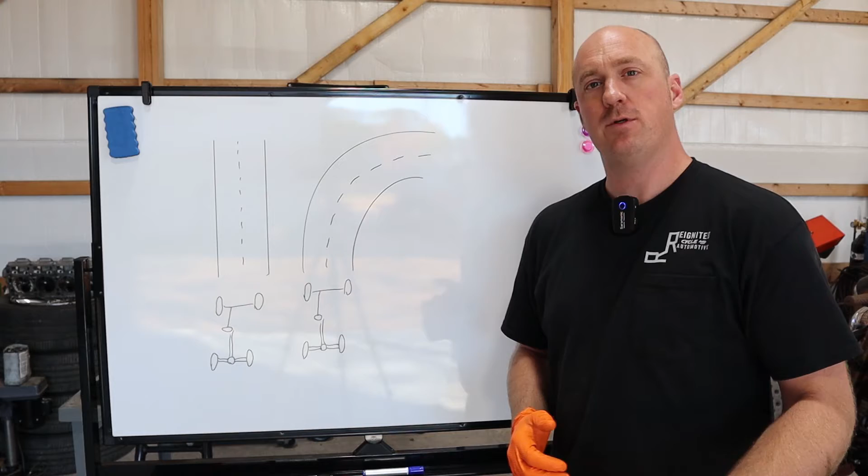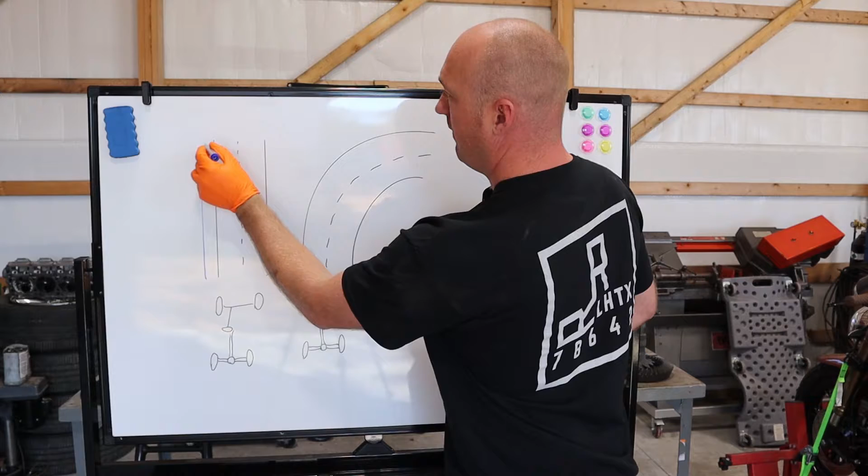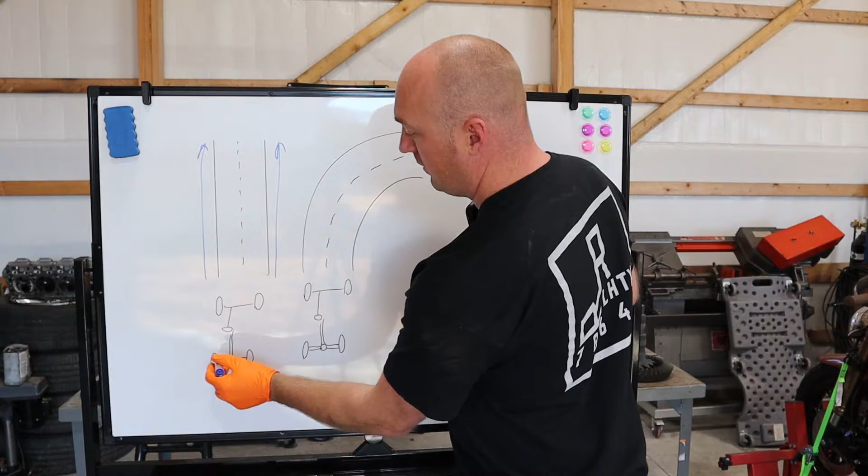Now, why would you want that? Well, in this very crudely drawn illustration here, I'll give you an example. So the vehicle, as long as it's moving straight, you can see that the path of the wheels is identical both sides. That means they're both traveling at the exact same speed. So in this case, if the rear differential were locked and both wheels were traveling at the same speeds, it'd be just fine because they have the exact same distance to travel.

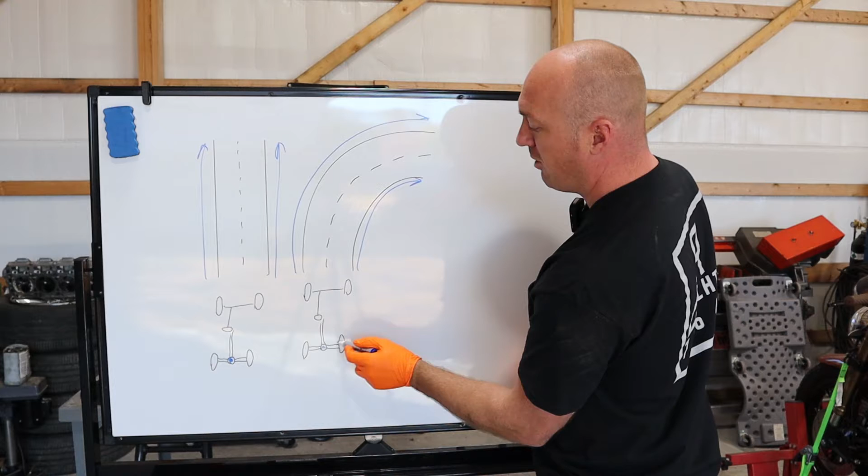Now, imagine you have to go around the corner, which does tend to happen when you're driving a car. You can see that the distance that the outer wheel has to travel is very much so farther than the inside wheel. So there's a differential of speeds happening there. If this rear axle were locked going around that corner, then this inside tire would be trying to match the speed of the outside tire, and you'd essentially be doing a burnout on the inside tire all the way around.

You can hear that in the car. It'll start to hop and chirp and skip around. Not something that people really want in an everyday driver. So they have what's called an open differential, which allows for that differential of tire speed so you can go around a corner smoothly and not even notice. Now, why is this a detriment?

Well, because of the way in which this open differential works, if you intentionally try to put power to the ground, as in doing a burnout or you're trying to take off from a launch, the vehicle is going to put all of the power to the tire that has the least amount of grip. So if one tire starts spinning, it's going to send every bit of power to that spinning tire. That's why it'll spin really, really fast, but the other tire won't do anything. And that's obviously not what you want in any sort of a drag race application or performance application. You want the power to be going to both wheels equally.

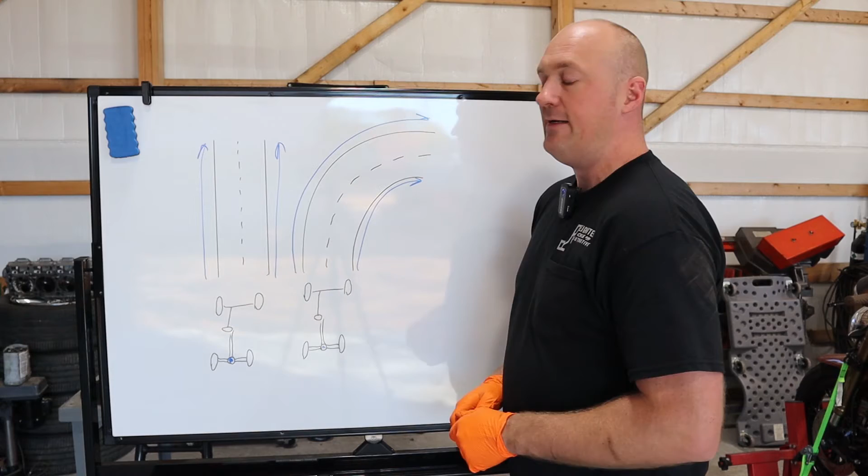Now, a limited slip differential allows you the best of both worlds. You will still have the open diff capabilities to go around corners smoothly, but when you really put the power to the ground, it will push that power out to both sides so you get power at both tires and you can get the maximum amount of traction available. So really that's the point of having a limited slip differential, and we're going to install it now on my C10.

All right, so we're going to be installing a posi-track style differential in this rear end, and I think it's important before we actually install this that you have an exact understanding of how this thing works, and it can get a little bit technical.

So in this case, I'm going to defer to my friend, Mr. Nunamaker. How exactly does a posi-track rear end on a Plymouth work? It just does. So there it is. Now you are fully aware and up to date of exactly how it is that a posi-track rear end works.

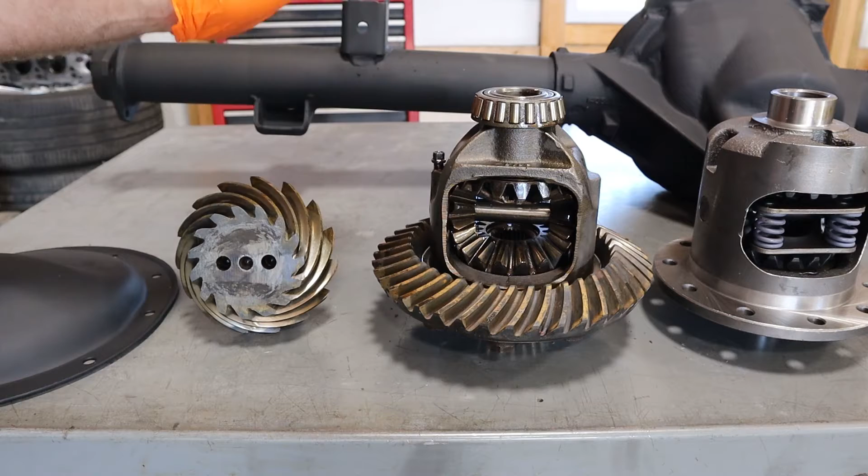Let's install it. All right, so another reason I'm doing the upgrade here, besides just the limited slip diff, is I'm changing the gear ratio because this gear ratio is 2.73 gearing. So it has 15 teeth on the pinion and 41 on the ring gear. 2.73 gears are great for highway mileage or for keeping the RPMs down when you're going highway speeds. That's not what I'm after here. I'm after something a bit more sporty.

So I'm going with a more traditional 3.73 gear ratio, but that means I have to replace both the pinion and the ring gear with a new one, which this is a great time to do it because I am replacing the carrier anyway. So let's move forward with that.

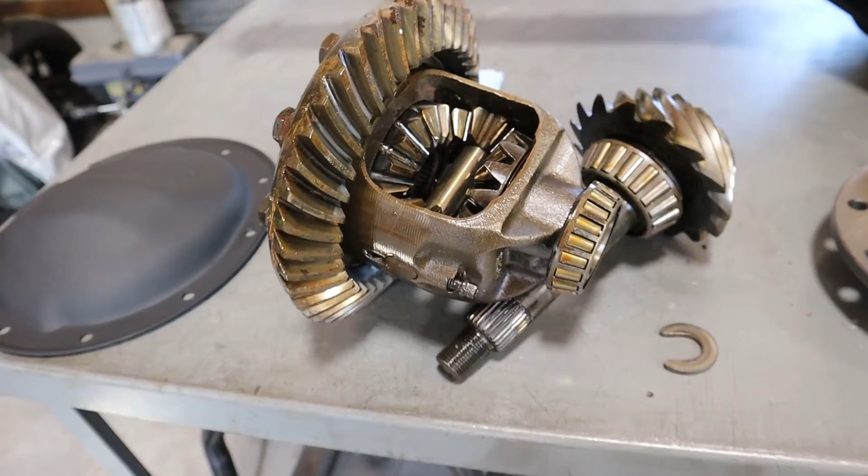All right, we're gonna start with a quick lesson on how to actually remove the carrier from the rear end, because you don't actually have to remove the entire rear axle from the vehicle to do this. So what you need to do is, there's a little bolt here.

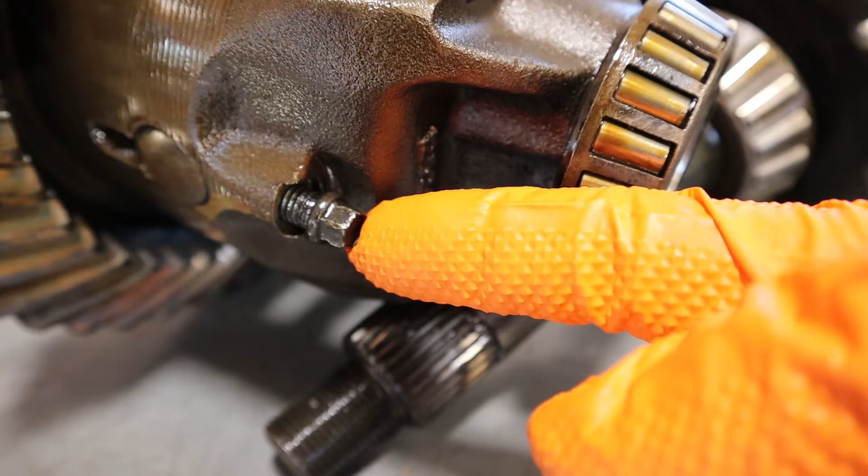You spin the carrier around so you can gain access to this little 8mm head bolt. And once you remove this, it allows the differential pin to slide out of the housing. Now, after that slides out, you push the axles in towards the center, and these little C-clips that are in there will fall out of place. Once the C-clips fall out of place, the axles themselves can be removed completely from the carrier assembly.

Now, once you've removed both of the axles, I definitely recommend that you put the differential pin back in and throw the bolt back in, because with the differential pin out of there, if you rotate the carrier, the spider gears can actually fall out of the carrier housing, and it is pretty difficult to get them back in there. So put the diff pin back into place before you go rotating the carrier.

And then after the axles are removed, go ahead and pull the caps on each side and you can remove the carrier from the rear end housing. All right, in this case, I will be replacing the carrier and the ring gear and the pinion gear, all the bearings with all new components. So basically this entire thing goes in the garbage, and we're gonna start fresh over here.

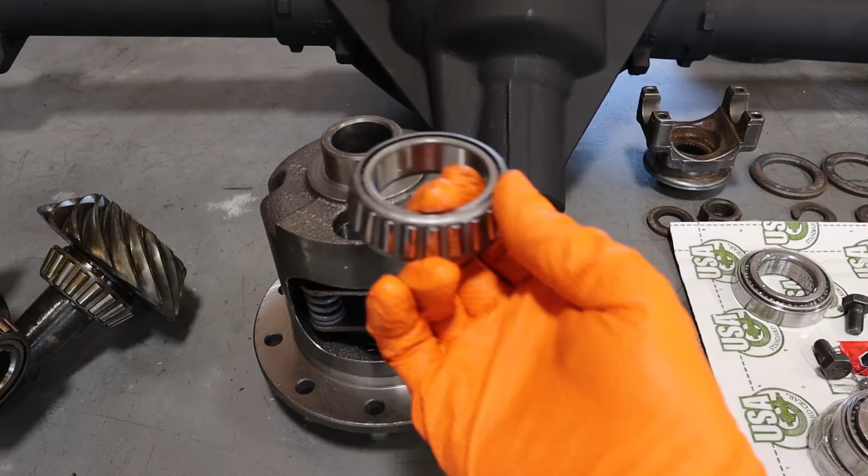So the very first thing we're going to do is install the carrier bearings on the end. Now, obviously it is best if you have a press to do this. However, it is not entirely necessary. If you can find a tube that has the exact diameter of the inside race here, okay, do not get any pressure on the outside race, but if you can find something that only has pressure on the inside race, then you can kind of pop that on with a hammer or something. But again, the best choice is always a press if you have access to one.

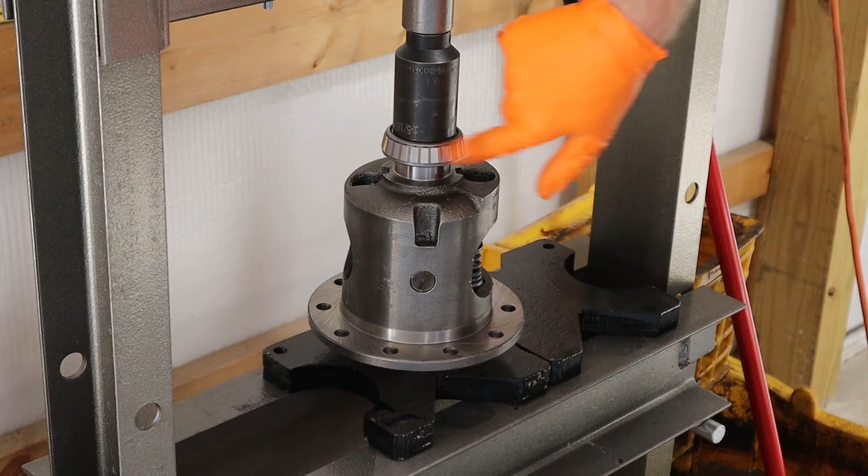So make sure when you're pressing this on that you can actually spin the outer race freely, so you know you don't have any pressure on this, only on the inside race. All right, so you saw there we got the carrier bearings installed on both sides. They both spin freely. Now we're going to go ahead and install the ring gear onto the carrier.

Now, something to remember about this ring gear and the bolts, which I got new bolts with our kit, is that they are left-hand thread. So remember that. Left-hand thread when you're putting them on. I'm gonna put some Loctite on here, torque them down, we'll be in good shape.

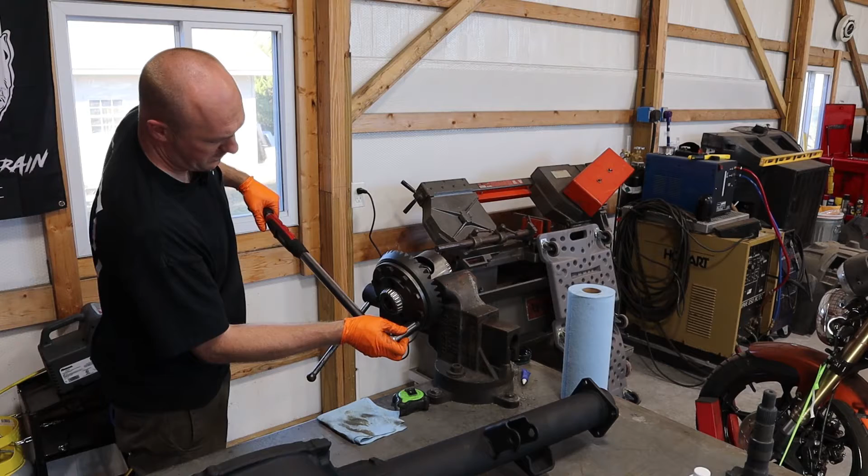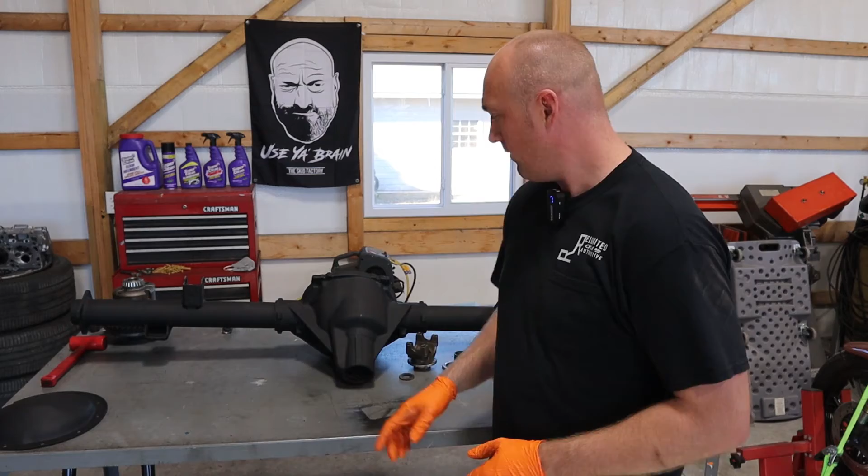All right, our next step is we're going to go ahead and install the pinion bearing races into the housing. There's one in the front and one in the back side there. A good tip here is to use the old bearing race to tap in the new one, because obviously it'll be the exact same size. It'll give you something to smack onto with your plastic mallet.

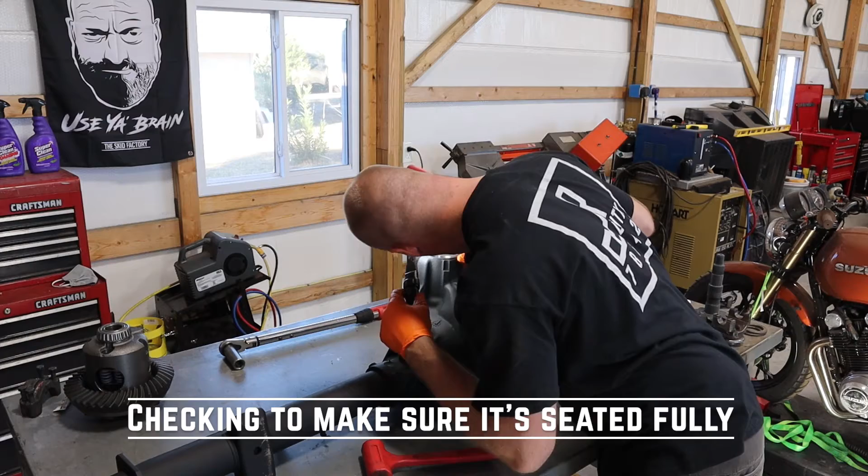So the next item on our list, we're going to go ahead and install the front pinion bearing and the pinion seal. So we already installed the race, just slip the bearing in there, center it, and we'll tap the seal into place.

All right, now that we've done that, the next thing we're going to do is try to establish our pinion depth. That's how far the actual pinion is sticking out of the case. So we have our new pinion gear here, our 3.73 gear. Now, the primary pinion bearing that goes onto this is a press fit design, and the spacers that we're using go underneath that bearing. So it's a real pain in the butt to actually press the bearing on and pull it off every time we're trying to change out our spacers to get our correct pinion depth.

So a good trick is to remove the original pinion bearing from your original pinion, use a carbide and grind out the center of it until it's a slip fit and just drops right on down. This way you can install and uninstall this as many times as necessary to get the proper spacing before you install the actual bearing.

Now in this case, what I'm going to do is reinstall the original spacer that was underneath the pinion bearing. We're going to start with that and see how close we are. So your standard 8.5 inch rebuild kit will come with one of these crush sleeves.

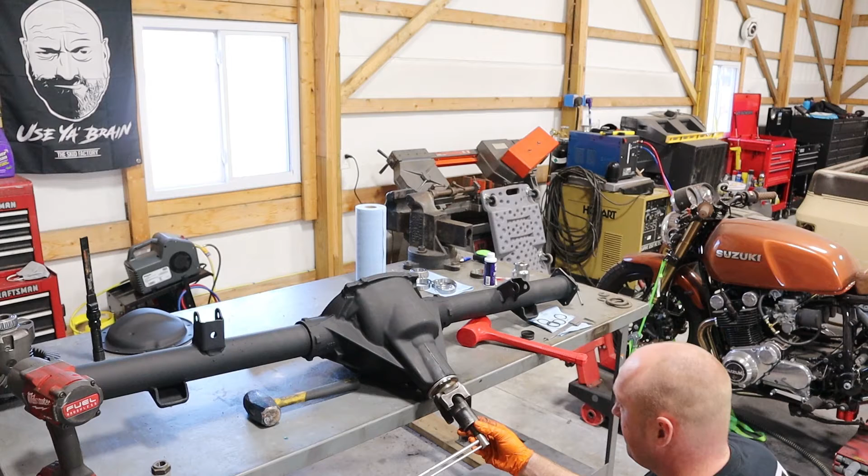All right, I think we are there. And keep in mind that 14 and 19 inch-pounds of resistance, that is for new bearings. If you're reusing the originals, your numbers are going to be different, so you have to look those up. But 14 and 19 inch-pounds turning torque resistance, and again, this is just with the pinion installed, not with the carrier installed.

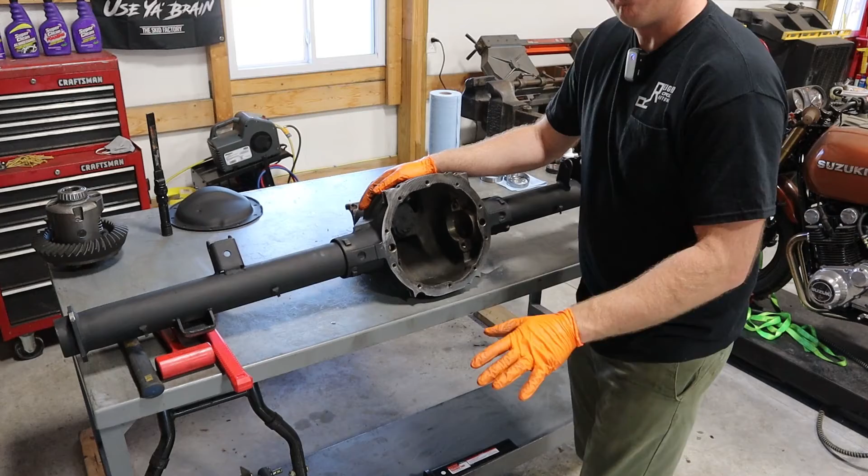All right, so we've got our pinion installed here. Again, it's not for the final time, but we have it in. Our turning torque is correct, so I know my spacers for the crush sleeve eliminator are good. Now I'm going to go ahead and install the carrier in here, try to get that set up a little bit. That way I can check the pattern of the pinion versus the ring gear.

All right, so I went ahead and just chose some random spacers just to get me somewhere in the ballpark on each side. I slipped the carrier assembly in there, and I've got the main caps back on. We're going to torque these things down to the proper spec. Don't worry, you're going to have this thing in and out quite a few different times while you figure out your spacing. But first I want to get this thing locked in here, tightened down, and then measure my turning torque again and see if that is within spec.

If it's not, then I'm going to continue to add some spacers. On either side, doesn't really matter. I'm going to add some spacers until I achieve the proper turning torque. And then you're going to set your backlash after that, which is how close the ring gear is to the pinion. So you're going to move it left or right based on that. If it's too loose, you want to move it closer to the pinion. If it's too tight, you want to move it further away.

But at that point, because your turning torque is correct, you know that your spacers are going to be the right size. So at that point, you're just transferring spacers from one side to the other to achieve your proper backlash. All right, so the torque down is 60 foot-pounds.

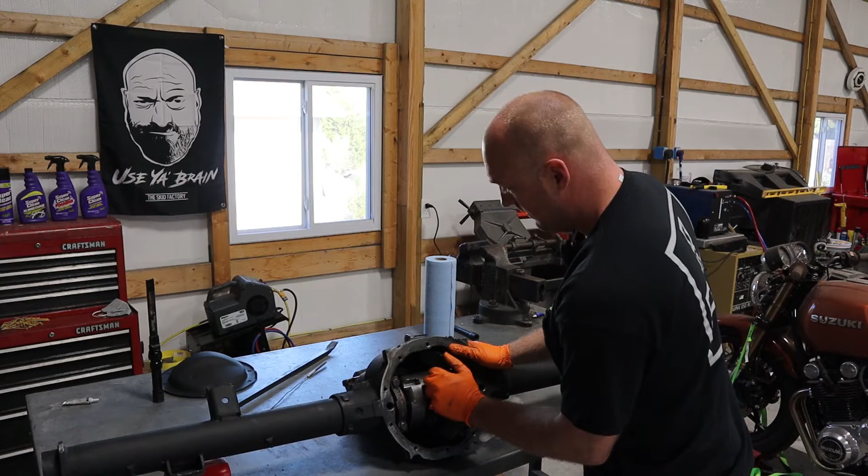We definitely have some backlash there. Let's go ahead and measure the turning torque. All right, so I've got the caps torqued down. I have my spacers in place. Now we can just put in an initial feel for the backlash.

So I don't have my dial indicator just yet. I'm gonna set it up here in just a moment, but to me, that sounds like there's a little bit too much backlash happening there. So I'm gonna go ahead and move one of the shims from this side to this side, one of the very thin ones. That way I can bring it closer to the pinion itself, and then we'll retest it again with a dial indicator.

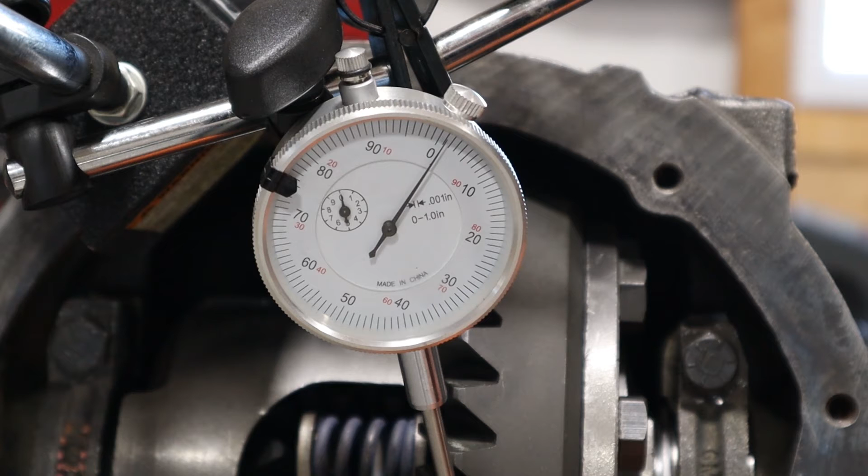All right, so I went ahead and shifted around the shims a little bit, and you can see here, backlash is right about 15 thousandths, which is quite a bit too much, so we still need to shift a few more shims. So I'll go one more, and we'll try this again. All right, so we set it up again, moved one shim. Right now you can see we got right about 7 to 8 thousandths of backlash. The spec is 6 to 10, so we are dead on there.

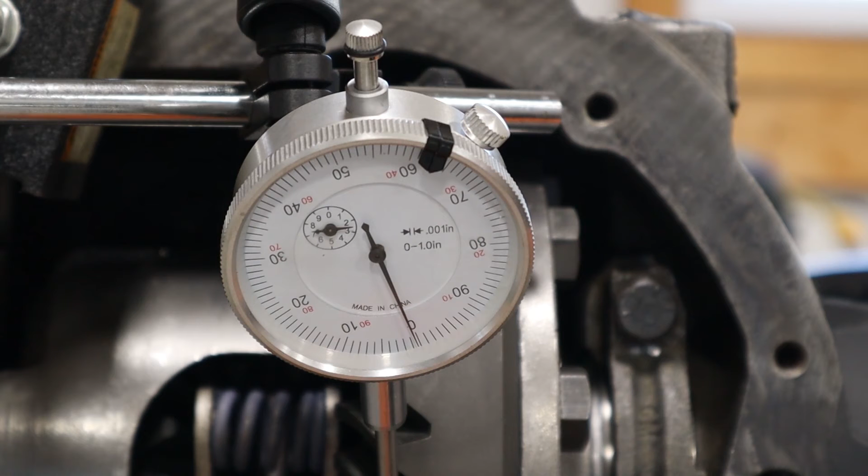Now I'm gonna go ahead and check the pattern on the teeth. Just gonna put some happy yellow paint on the teeth here. That way they can be with their friends. Now we're gonna go ahead and spin this through a couple of cycles, maybe go back and forth with it, and then we're gonna try to see where our marks are, if they're centered in there or if they're too far off to one edge or the other.

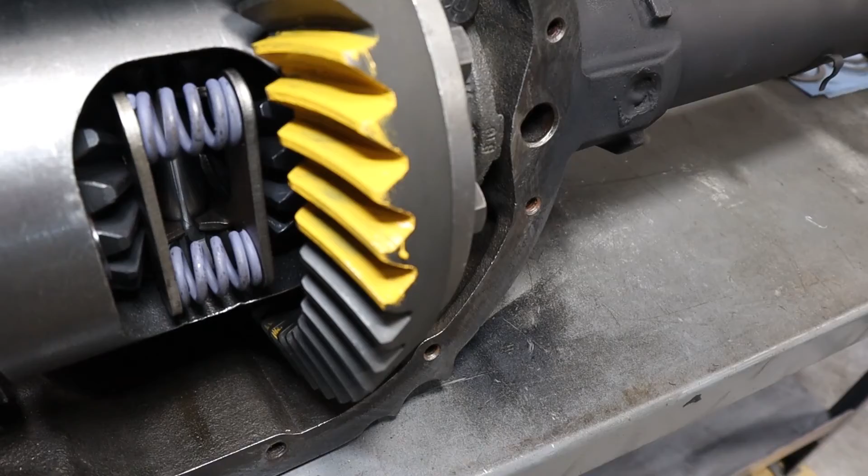All right, so taking a look at our pattern here. Yeah, it's gonna be kind of tough to tell on camera, but there you go. So you can kind of see that it's more towards the front edge of the teeth. And then if you look on the back side here, yeah, we definitely want it a little bit more centered than that. So I'm gonna go ahead and add a shim to the pinion depth to bring it out just a little bit more. And then we'll have to reset everything up. That's kind of what this is. It's a trial and error, and you just gotta keep trying again and again until you get the setup right.

All right, I brought the pinion out just a little bit more. Went ahead and reset everything up, checked my backlash, we're all good. So let's go ahead and check this pattern again. All right, after a bunch of switching things around, I think I've got a pretty decent pattern going on here. There you go. Kind of see there. And there. There you go.

So we're all set up now. We've got our pinion preload set correctly. We have our carrier preload set correctly. We have our backlash set correctly. So now it is just time to take it all back apart, press on our new pinion bearing, reassemble everything, and reassemble the axle itself.

All right, there it is, guys. We have our limited slip differential installed here. I'm really happy with the pinion bearing preload that I have. The backlash is within spec, and our gear pattern looks to be in good shape as well. So the next step here is to put the backing plates back on, slip the axles back into place, put the C-clips back on, put the drums back on, and then we can put this right back underneath the truck again. So I hope you guys learned something today.